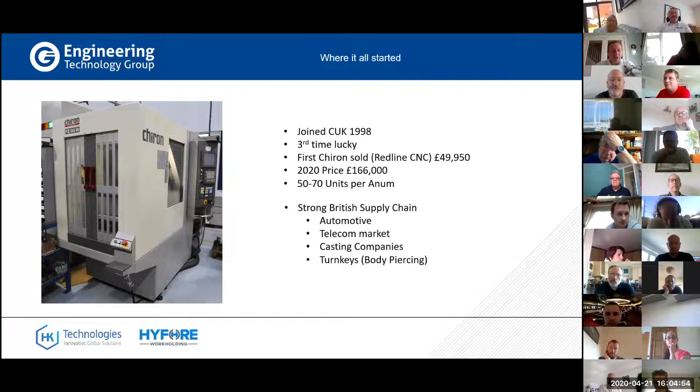So quite significant in the price difference there. If we look at the same machine with the same specification sold in 1998 against the current price list, that machine that was sold at 49 grand would actually be sold for 166,000 today. So quite a big jump in that same level of machine, albeit it has jumped up in technology and various things have changed on there to make it for the better.

So I joined Chiron UK in 1998, to give you an understanding, we were probably selling between 50 and 70 units per annum, which obviously we'd give our right arm to be selling that number of Chirons within the group today. But I think the price and everything else has had its part to play on that. But I would say back in the late 90s and early 2000s, we did have a strong British supply chain. Automotive was very, very strong in medium and high volume markets.

We had the emerging telecom market as well, with electronic boxes and masts, as we were moving into the mobile technology market. That was very good for me in selling these machines, as a high-speed Chiron for doing aluminium boxes was extremely useful. Another good route for me at that time was casting companies making aluminium castings, needing to machine various faces, drilling and tapping, and getting those components through the machine as quickly as possible. That was also a very good outlet and kept me very busy.

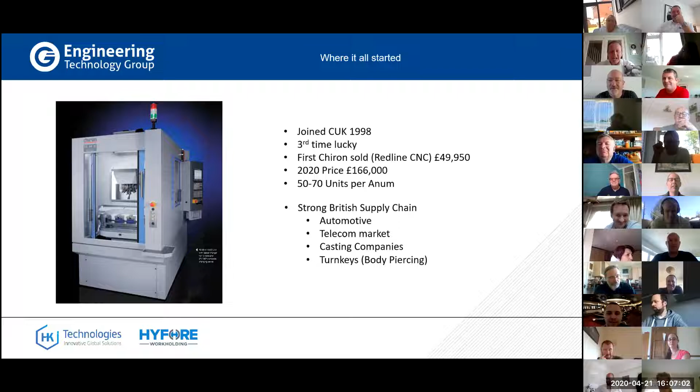So Chiron is one of our major principals. Chiron only make vertical machining centres - that's all they produce, in 3, 4 and 5 axis configurations with multiple spindles, swivel heads and 2-axis rotary tables as a further option. The turnover of their company is roughly around £410 million, with more than 2,000 employees within the business. Our working relationship with Chiron is now reaching 24 years by the end of 2020.

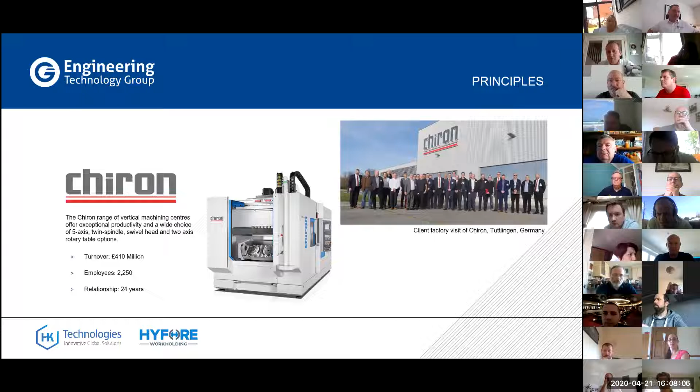The picture in the top right-hand corner is from one of our client visits, what we used to call our study tours. This is from the last one we did in 2017, where we took over 30 customers to see the factory and understand a little more about Chiron's philosophy. A majority of people in that picture are still good clients of ours today, with further developments and relationships moving forward.

To understand the Chiron philosophy, one of their good points is their marketing material is second to none. When we're sitting down with a customer, we're able to very quickly show what the configurations and specifications could be through the Chiron symbols, small icons we can pick out for every machine series. With the main spindle configuration, we have the FZ single spindle, the DZ double spindle configurations, which we'll talk about in more detail shortly, and within the 15 series, we also have a 4-spindle option called the TZ.

Within those heads, we also have the swivel head or B-axis configurations, giving us a little more flexibility. From a tool changer perspective, we have the basket tool changer, which is Chiron's patented design with a sub-1-second tool change time - I've got some video to show you a little later. There's also the K-style machine, with the chain magazine or pickup stations, where the spindle picks the tool up directly from the chain.

Moving on to table configurations - very important when talking with customers about what options we have. We have a standard fixed table 3-axis through a pallet changer, 5-axis through to long bed configurations, which are mainly in the mill series now. From a technology package perspective, we also offer a multi-profile machining system, which allows us to machine from extruded forms in a very small machining platform, but with very long extrusions.

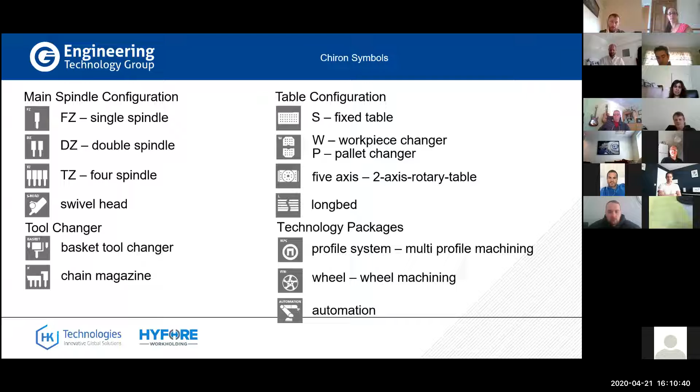So we come to the DZ program, or double spindle. The DZ machines were originally launched back in 1984. Certainly the first machines had the patented basket tool changer, which is a 0.9 second tool change. On the DZs, the early machines were 2 times 12 tools, so a very dedicated productivity machine.

25% of all Chirons sold are double spindle machines, which is a quarter of their production. They produce roughly around 800 machines per year, so quite a significant number of machines as double spindle. There's more than 3,600 DZ machines globally that have been running around the world as we speak.

Predominantly the DZ program really does suit the mid to high volume product range, which is first tier to the OEM market, where we've been most successful. OEMs can understand that this level of productivity for their own products is the right way to go. So certainly when we're sitting down with customers, we're looking for serial production, somebody making a series or a long series of the same components, which makes it very easy to get the best out of these machines.

Chiron's strap line is seconds ahead. Certainly what that means is being able to maximize the productivity of the machine, limiting the amount of downtime, and being able to make tool changes as quickly as possible, workpiece changes as quickly as possible. So we're getting maximum productivity.

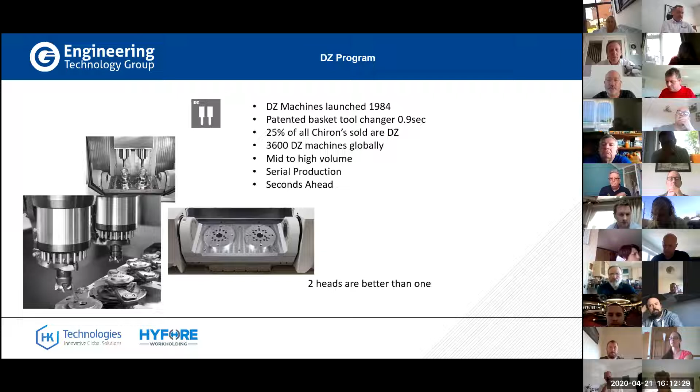The most important thing to mention is 2 heads are always better than 1, here demonstrated by Holger Hell from Chiron and our group managing director, Martin Doyle, who's giving him a talk on the best of British manufacturing.

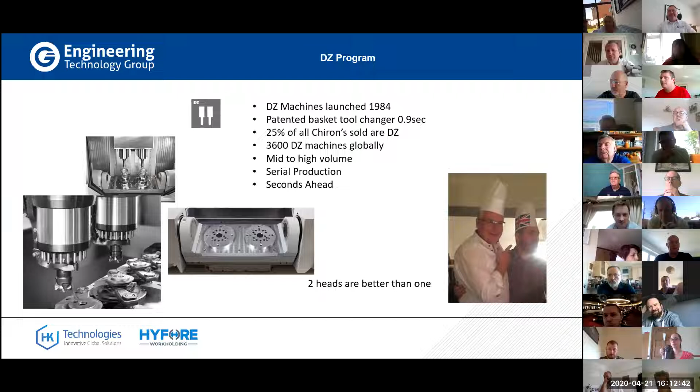Taking a bit of advice from John Mannion, I've prepared a short 15 minute video just explaining a little bit more about the DZs. Oh sorry, 3 minutes, only joking. So here we go, just want to show you a little bit more in animation of the DZ range. That'll do.

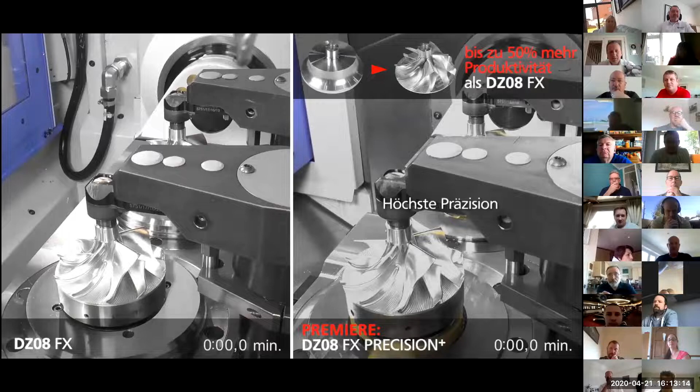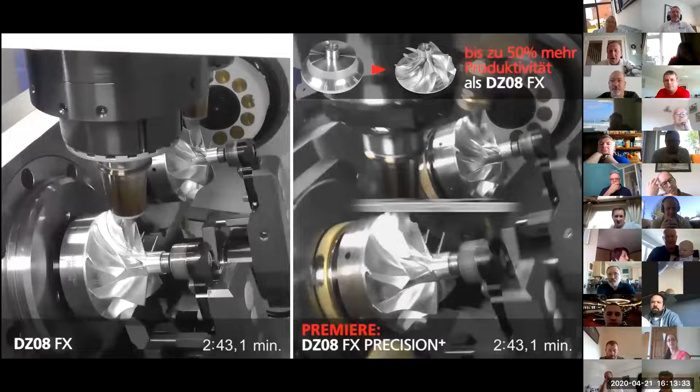So here we start with the small platform, which is the smallest one, the DZ08 5-axis machine, which has been perfectly suited to impeller machining, as Chiron's core competency is in the turbocharger market. But as part of their own development, you can see here we've got the Precision Plus machine, which is a new development with linear drives, which obviously makes a significant difference even over their own machine, new technology changes and developments of their own product.

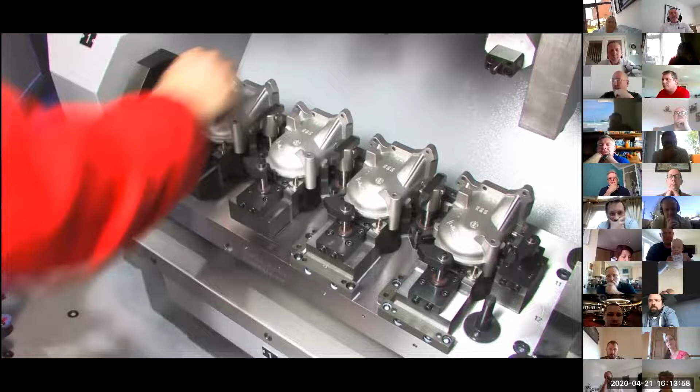The DZ12 here is showing us with a pickup magazine double spindle, but with a 4-part load, able to maximize the amount of productivity within the machine.

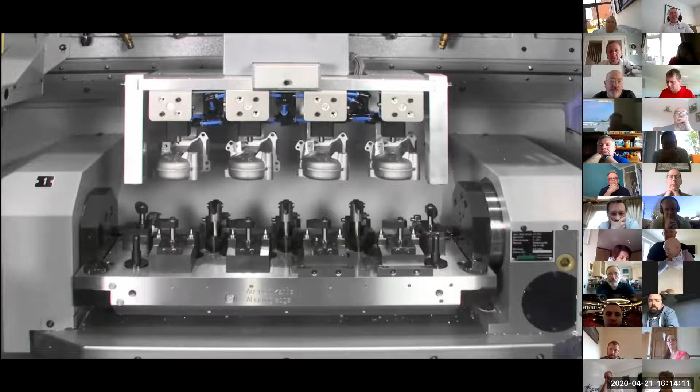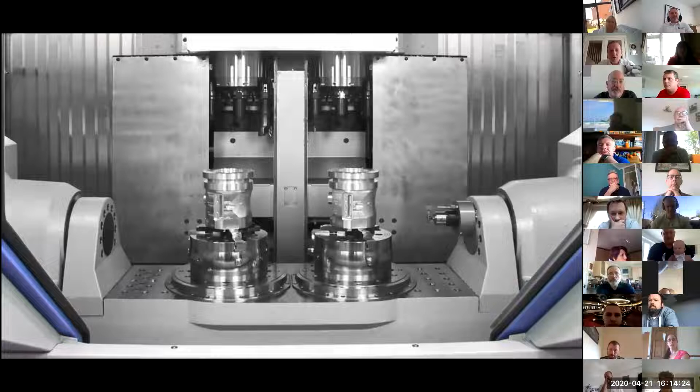Then we move on to the next series, the DZ15, showing here the pickup of the tools from the chain. But here, the important thing to mention is with the torque tables built into the 5th axis, it's actually got full mill turn capability here as well.

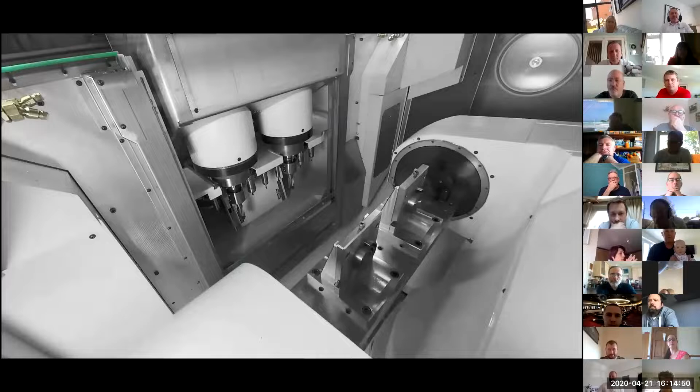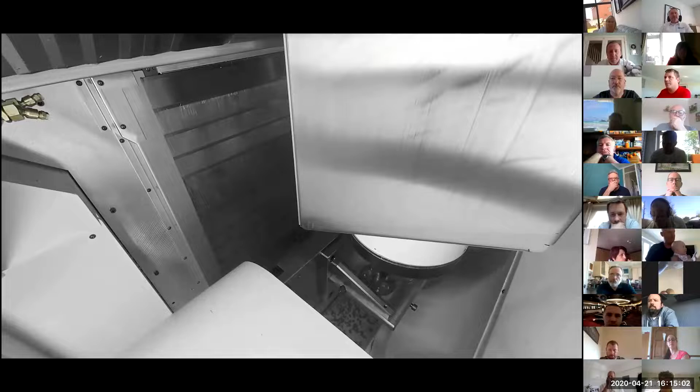And here we have the DZ16. This is one of Chiron's new developments, moving forward with their first gantry style, where the Y-axis is actually coming over the top rather than a traveling column per se. Important benefits here on very complex components, as you can see in the tool changer, is 2 chain magazines on top of each other, which allows for more tools, more complex components, but remaining within the same footprint of the machine without the need for very big background magazines.

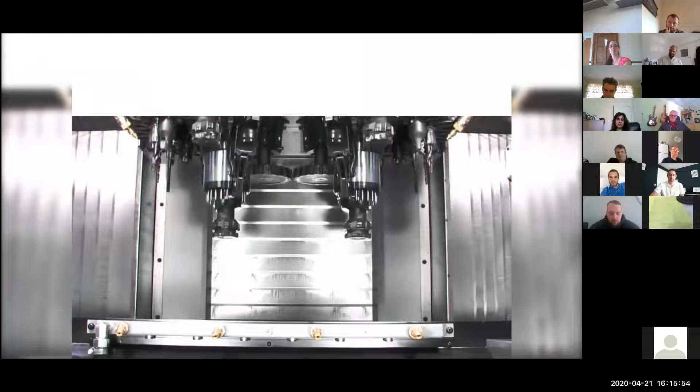Now we come to the 18 series, which is the workhorse of Chiron's productivity for the cast steel and forging market, which obviously CNC Speedwell is quite a big user of these particular machines as well. Here you can see the patented basket changer, the way that it's designed, where each tool is in its own independent arm on its own pneumatic cylinder, therefore being able to give the fastest tool change possible.

So as we start to look at the DZ program completely, we have 6 platforms that the twin spindle technology is available on, from the DZ08 through to the DZ25. Within those configurations, there are actually 25 different options available to us when we're sitting with customers to look at how we can actually run a twin spindle machine. So the most important thing here to notice is when we're sitting down with a customer on sizing parts, as normally with any machining centre, we look at the X, Y and Z to give us the right platform.

When we're looking at twin spindle technology, we're looking at the spindle distance to be able to fit in a fixture, a hydraulic supplied fixture from Hyfore for instance, and how we can get enough clearance in there with the tools. It's important that we can size the part, but also get the spindle distance correct to multi-load as many parts as possible on the table, giving us that best particular option.

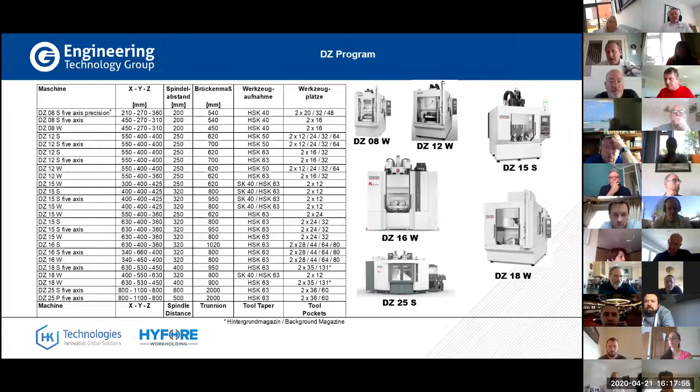Within all of the machines, right back from the 08 which has high-speed spindle options, we go right the way from HSK 40 up to HSK 63 as the tooling back ends. But with some technology being shared with Stama now, there will be a HSK 100 option for heavier duty applications available within the group shortly.

Now the important thing when we look at components and productivity is the time per part comparison. So what we're looking at here is a table where the DZ is automatically going to be a 2-part load set against a single spindle, single part load, and double part load with 1 spindle. Here we're showing what the productivity gain is just on having 2 parts on the table. It's roughly around 57% of a standard cycle time regarding the takt time.

And if we're then able to squeeze on 4 parts onto a double spindle machine, that reduces further to 48% of the original cycle time. So therefore, in a lot of cases, 2 spindles with 4 workpieces, depending on size, is actually an optimum way of being able to run the machine efficiently.

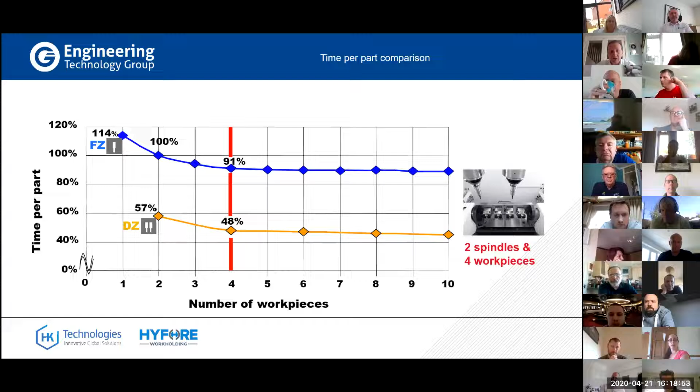An important thing we need to discuss with a customer is floor space requirements set against cost per part. Here we can see if we look at our competitors with a single spindle, single part load, with a machining time of 350 seconds, based on a charge out rate of most companies at £70 per hour for instance, to manufacture that component on average would cost £6.97 to produce. And based on a production rate of 500,000 parts per year, this would lead to an investment level of 11 machines.

Where we start to go through the Chiron range down to line 6, we can see that we've taken that with a double spindle and a 4-part load from 350 seconds per part down to 110 seconds per part. Therefore, reducing the cost of manufacture per part down to £3.36.

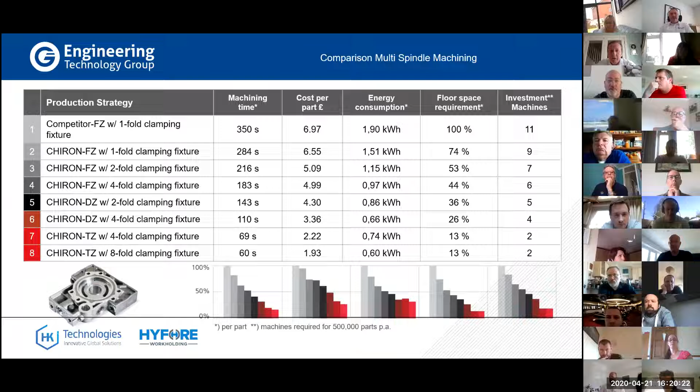As we can see, by running those particular machines, the level of energy consumption is much less because we're running less machines and less spindles. We've got a floor space requirement of only 26% based on 11 machines required to produce that volume, which leads us down to 4 DZ machines giving us the same productivity as 11 single spindle, whether that's vertical or horizontal. So a very important slide to discuss with our customers.

The important thing about any productivity is to understand what the takt time is and how important takt actually is. So to find the best production solution, we need to know the takt. And to calculate takt, very simply, available production time per day divided by the customer demand per day.

So here we have a solution. When we sat down and King Automotive were looking at a potential project with their customer, they needed to make 2 million conrods for JLR per year with a takt time of 11 seconds. So who are you going to call? Not Ghostbusters in this particular instance, but ETG and Chiron. Sitting around the table, we were able to manage exactly their expectations and get all of the parts through a particular line with decreased floor space and achieve the exact desired takt time of 11 seconds with our production cell.

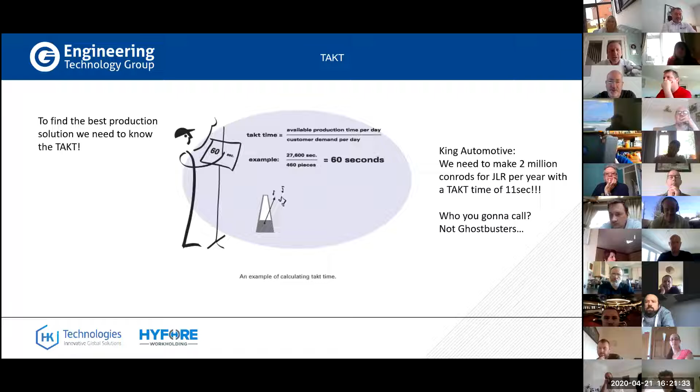So as we start to look at DZ developments, I want to quickly show you a video briefly of the next development, which is now the DZ25. This is the next step up from the 18.

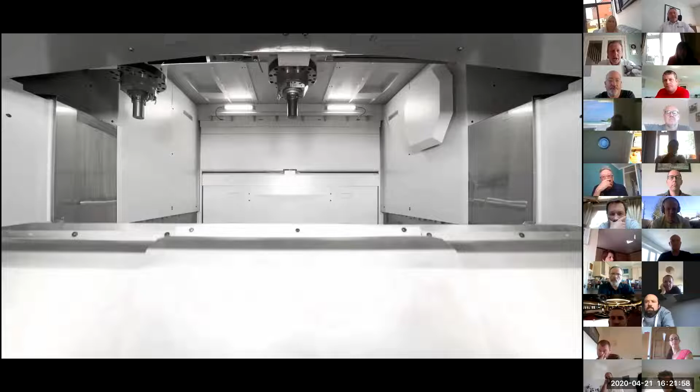Important things to notice here are major design changes with independent spindles. We've got the Y-axis integrated into the side wall of the construction, really opening it up and allowing us to have independent Z-axis.

The benefits on the DZ25 from that brief video you saw are the new open gantry design, which allows ultimate swarf evacuation through the machine.

We have independent X-axis, so the tool changers were mounted on both sides of the machine, meaning the spindles have to move in opposite directions to change tool. But we have a lock function which brings them back on centre line at an 800mm spindle distance, which locks up to the pallet distance in the centre.

With independent Z-axis as well, this now opens up other options for different Z heights and tool offsets, which we didn't have previously with fixed head technology.

The machine has also been designed with linear motors, certainly in the Y-axis, which gives us rapid speeds now up to 120 metres per minute, and a 1.5G acceleration, making highly dynamic machines.

Further developments in twin spindle technology from Chiron is the new DZ22, the new 600mm spindle distance machine, designed around the 16 series platform you saw earlier, in that configuration.

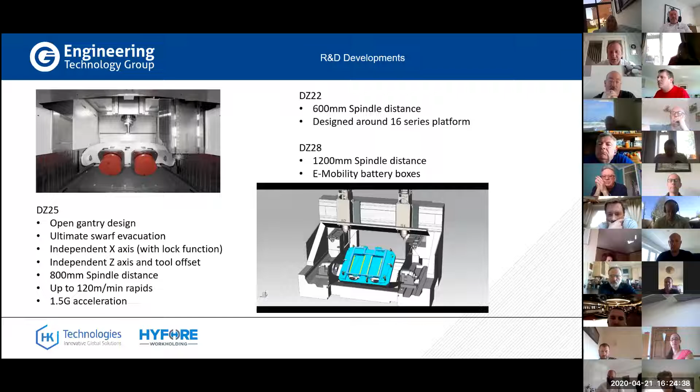Regarding DZ technology, the benefits we see when sitting down with all of our customers, looking at multi-spindle technology, is that we want to make sure we're offering the lowest cost per part, double productivity on the smallest footprint possible, which leads to lower cost of ownership, as we have less wear parts and less machines.

That obviously leads to less operators required to stand in front of the machines, which lowers and benefits cost there as well.

Chiron also has the twin spindle basket changer, which equals the fastest global twin technology in the world. The DZ12 2x64 tools has also gained the smallest footprint with that level of tool capacity in the market, another good first for Chiron.

They've also been able to prove they've had the longest market share since 1985 in double spindle technology. Further developments mean another benefit to us is the move to independent spindles in the Z-axis for various customers who are going to be looking for that in the future.

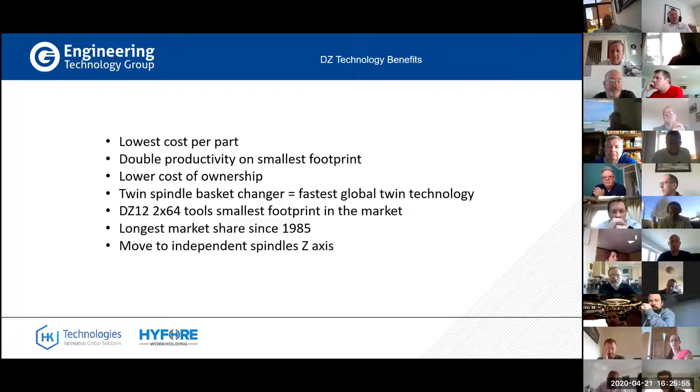So I hope that concludes, and thank you very much, vielen Dank, for your time and looking into what the DZ program actually is from Chiron. So if I could open up to questions from the floor, I'd be very interested to see what people think.

Thanks, Graeme. That was great. You can tell Jackie Rhodes taught you well. She did indeed, she did indeed. Learn from the master. I'll just get the chat up and then we'll do some questions. No problem. Okay, Jamie Fletchmore.

Hey, Graeme. Jamie? Oh yeah, good one. Good presentation there. Just a quick question there.

Just when you're talking about twin spindle technology, some of the things we face with customers is comparing twin technology over single spindle. On a twin spindle machine, if a spindle goes down, the whole machine stops, whereas if you had two separate machines, if one spindle goes down, you've still got production.

From a sales point of view, what would your argument or counteraction be against that? That's always quite a typical question that most customers would actually put forward, and it's always going to be valid. You can't always answer that.